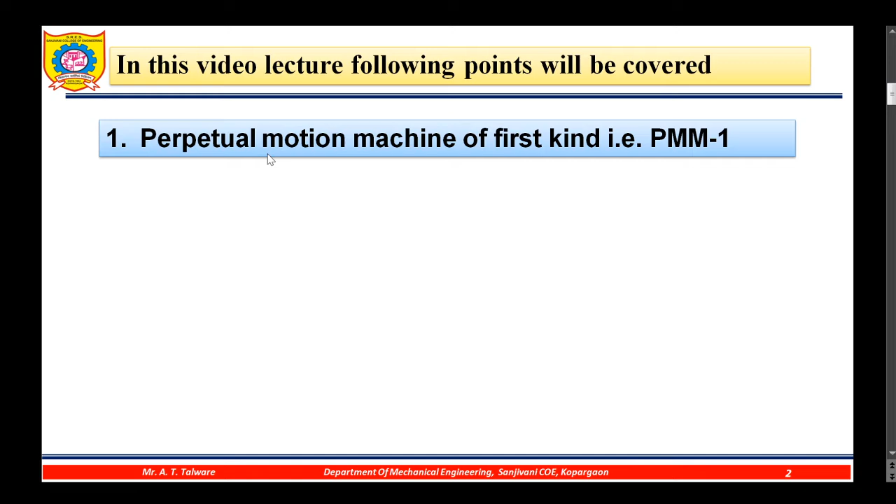First, perpetual motion machine of first kind, that is PMM1, and second, numerical on first law of thermodynamics for a closed system undergoing a change of state.

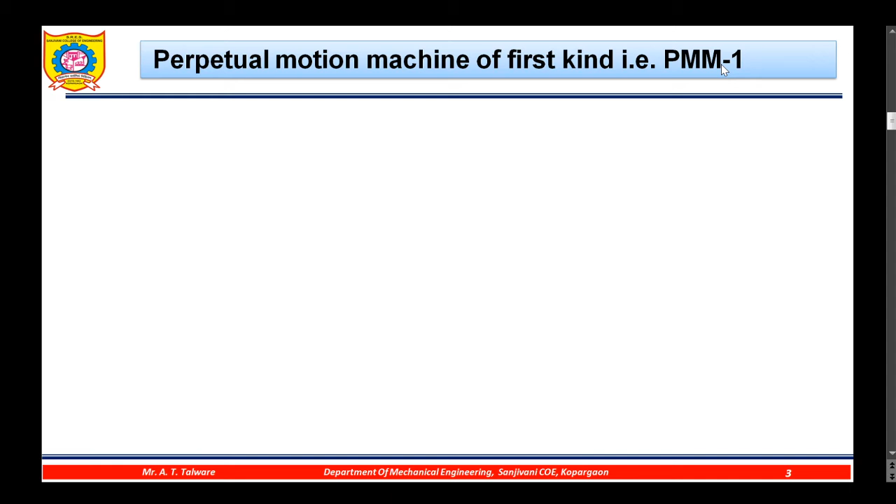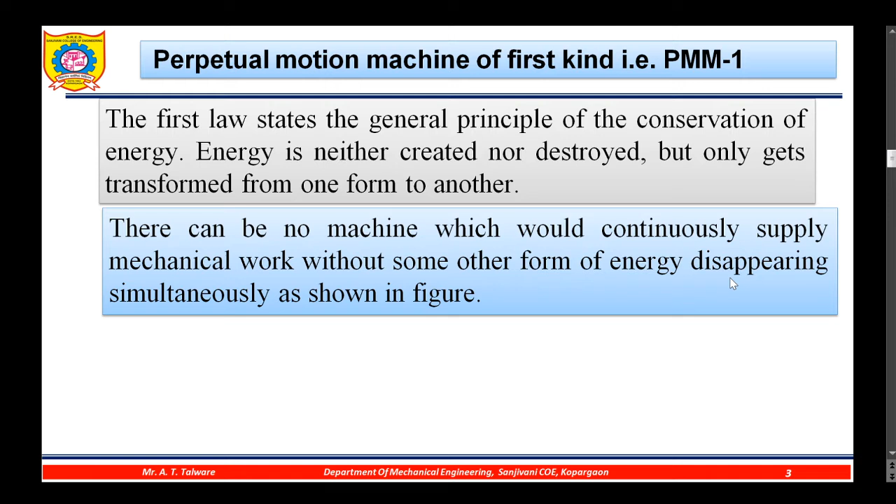Let's understand the perpetual motion machine of first kind, that is called PMM1. The first law states the general principle of conservation of energy. Energy is neither created nor destroyed, but only gets transformed from one form to another. There can be no machine which would continuously supply mechanical work without some other form of energy disappearing simultaneously, as shown in the figure below. So in this diagram, it is shown that work is produced, work output is there

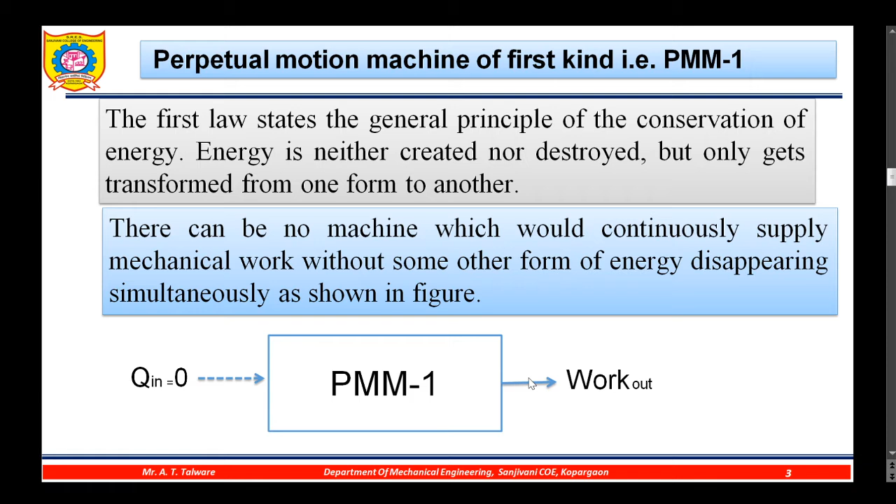without consuming any form, that is Q in is 0. Such a fictitious machine is called perpetual motion machine of the first kind, or in brief PMM1. A PMM1 is thus impossible.

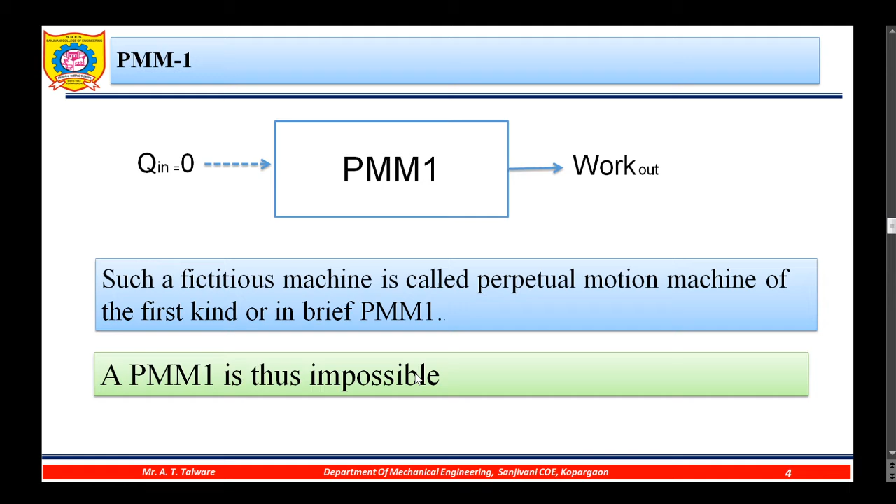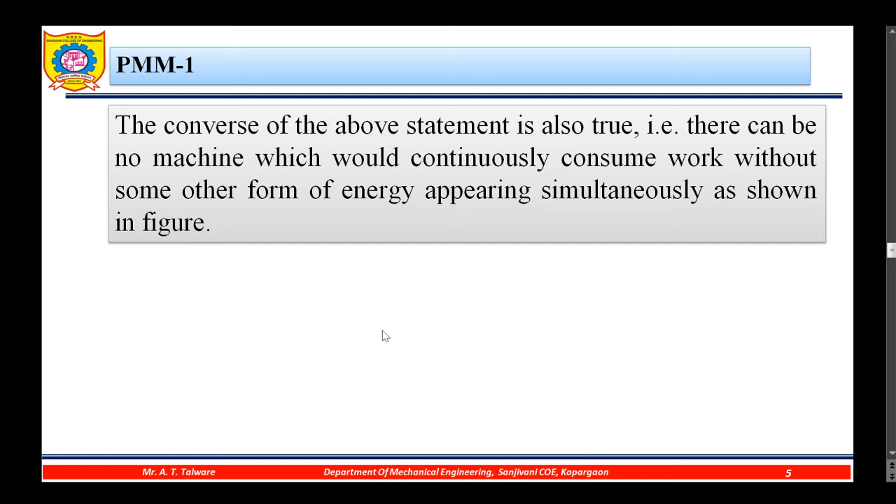The converse of the above statement is also true, that is, there can be no machine which would continuously consume work without some other form of energy appearing simultaneously, as shown in the figure below. In this diagram, it is shown that it consumes work, the work is supplied to the system, but the Q out is 0, or there is no other form of energy change occurring in the system.

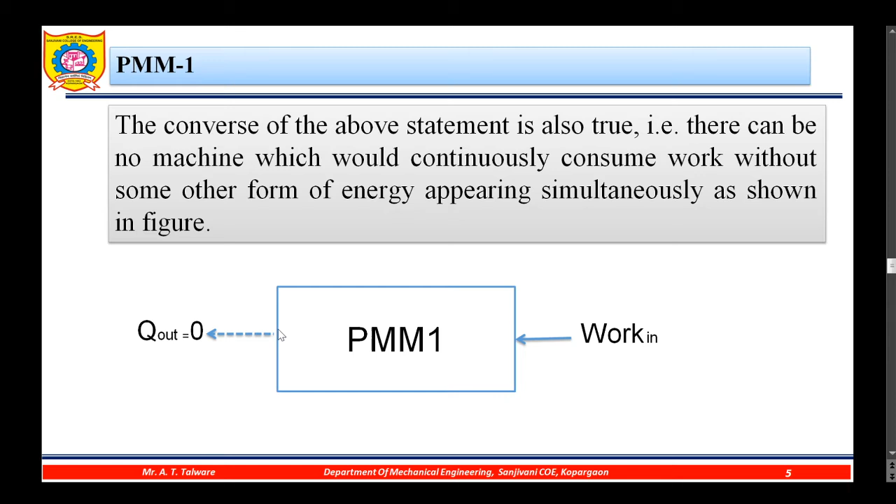So this is also impossible. Reverse is also impossible. So in unit number 3, we'll learn the PMM2 type, okay, that is the second kind.

Now we'll solve some problems on the first law of thermodynamics for a closed system undergoing a change of state. First problem: a stationary mass of gas is compressed without friction from an initial state of 0.3 meter cube and 0.105 megapascal to a final state of 0.15 meter cube and 0.105 megapascal. The pressure remains constant during the process. There is a transfer of 37.6 kilojoules of heat from the gas during the process. How much does the internal energy of the gas change? This is the problem statement.

Now, after reading this problem statement, what is constant here? The pressure remains constant. Here, see 0.105 megapascal and 0.105 megapascal. So it is a constant pressure process during which there is a transfer of 37.6 kilojoules of heat from the gas, meaning from the system to the surroundings. So this is cooling, heat will be rejected. So it's a constant pressure cooling process, or heat rejection process, which we can represent on the PV plane.

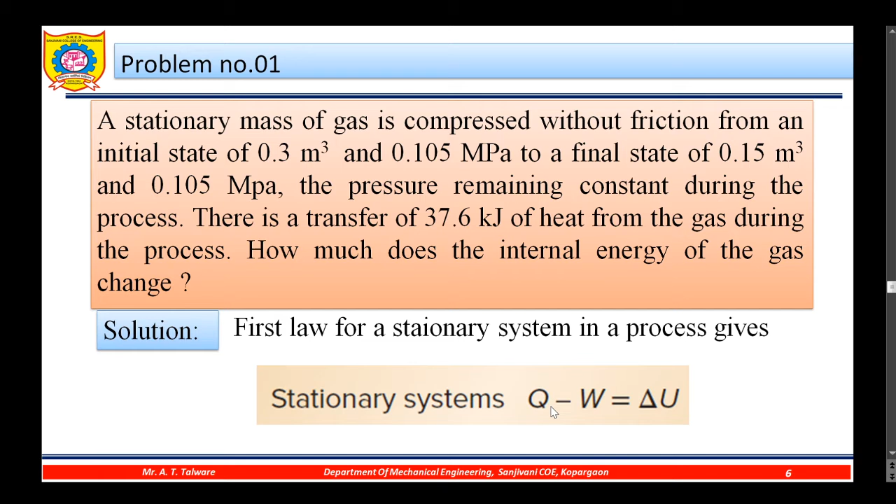First law for a stationary system in a process gives this formula for the calculation. There is a relation between Q, W and delta U: Q minus W is equal to delta U. Now this process can be represented on the PV plane like this, 1 to 2. The heat rejection process, Q will be out. Now we are to find out the relation, as I've told you, Q minus W is equal to delta U.

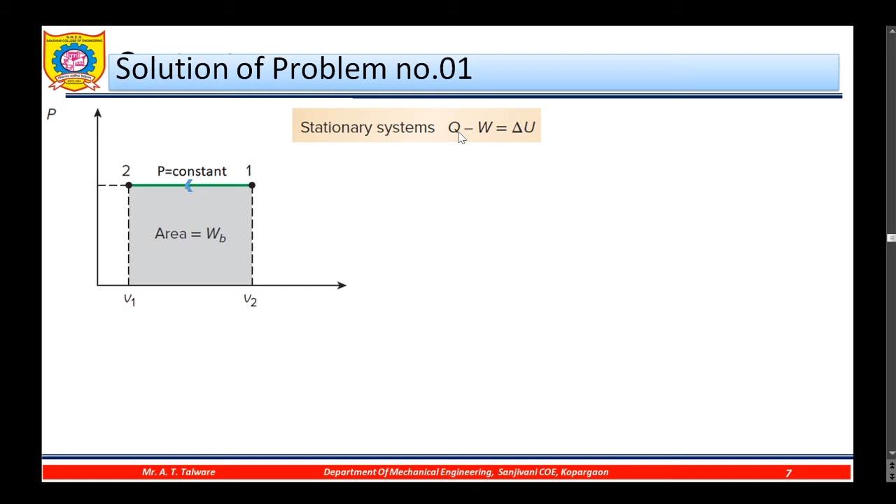The formula for work done, that is boundary work, is W equals P times (V2 minus V1). Here the pressure is given in megapascal, that is 0.105, converted into kilopascal by multiplying by 10 to the power 3, and the change in volume is 0.15 minus 0.3, which comes to minus 15.75 kilojoules.

Since we converted this, the 0.105 is in megapascal, so megapascal is converted into kilopascal. 1 megapascal equals 10 to the power 6 pascal, that is 10 to the power 3 into 10 to the power 3 pascal, so the multiplying factor is 10 to the power 3. Sorry, it is not in bar, it is given in megapascal.

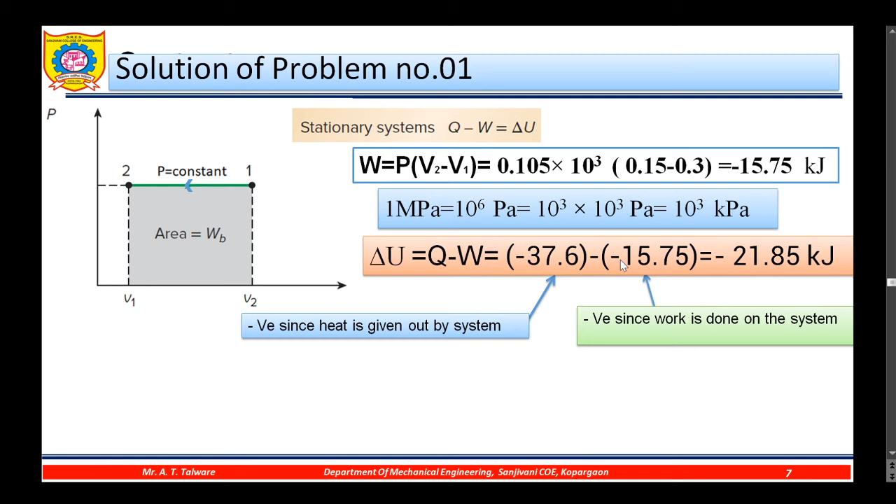Now from this equation, delta U that we have to find is Q minus W, and Q is minus 37.6 minus (minus 15.75), which comes to minus 21.85 kilojoules. So why is the negative sign used? The negative sign is used since heat is given out by the system. As per sign conventions, heat given by the system is negative, and since work is done on the system, the work is also considered negative here, that is minus 15.75.

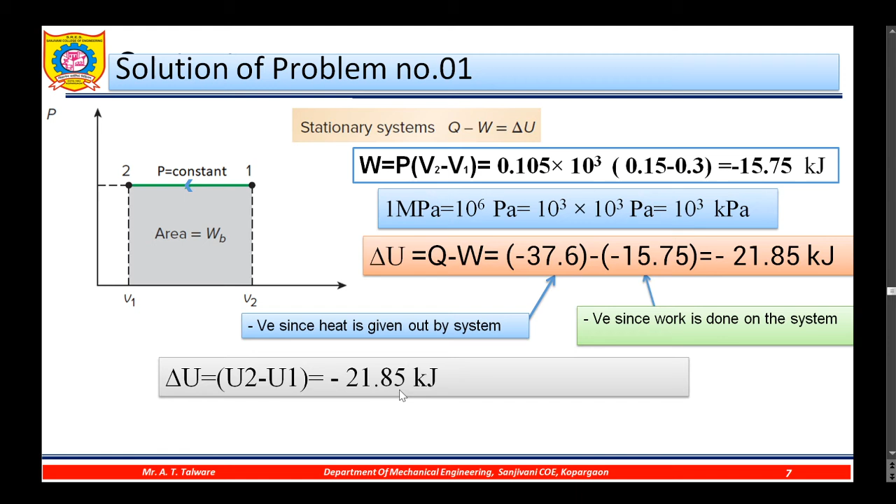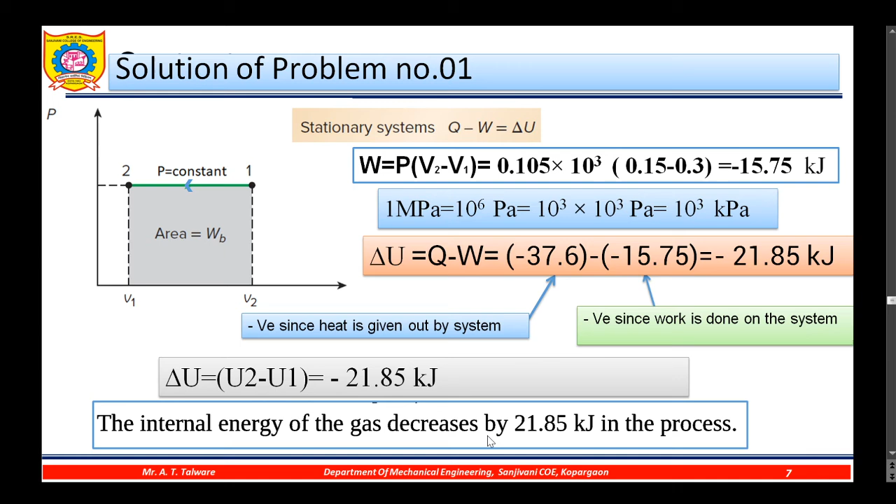We have to consider while solving the problems the magnitude as well as the sign, so that is very important. Now delta U is equal to U2 minus U1, that comes minus 21.85 kilojoules. The internal energy of gas decreases by 21.85 kilojoules in the process, because this negative sign implies decrease in internal energy of the system. So this is the final answer of this numerical.

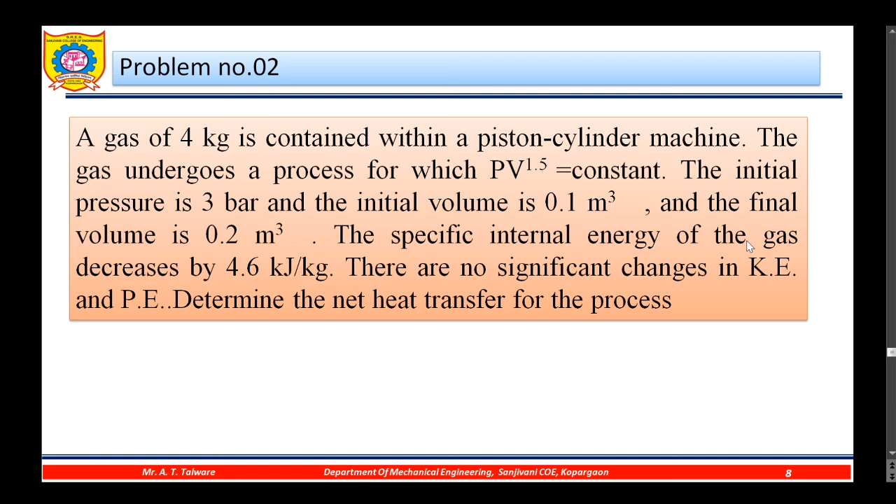Now problem number 2. The statement is like this: a gas of 4 kg is contained within a piston cylinder machine. The gas undergoes a process for which PV raised to 1.5 is equal to constant. The initial pressure is 3 bar and the initial volume is 0.1 meter cube, and the final volume is 0.2 meter cube. The specific internal energy of the gas decreases by 4.6 kilojoules per kg. There are no significant changes in kinetic energy and potential energy. Determine the net heat transfer for the process.

Now we'll solve this problem.

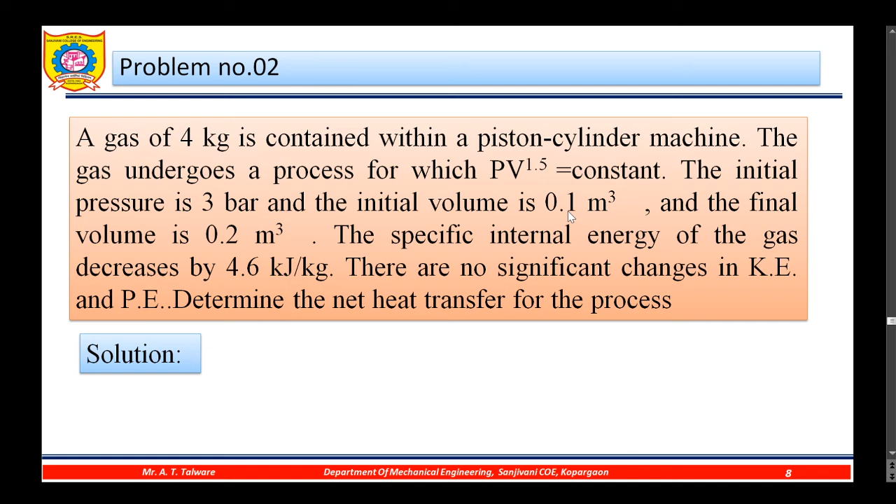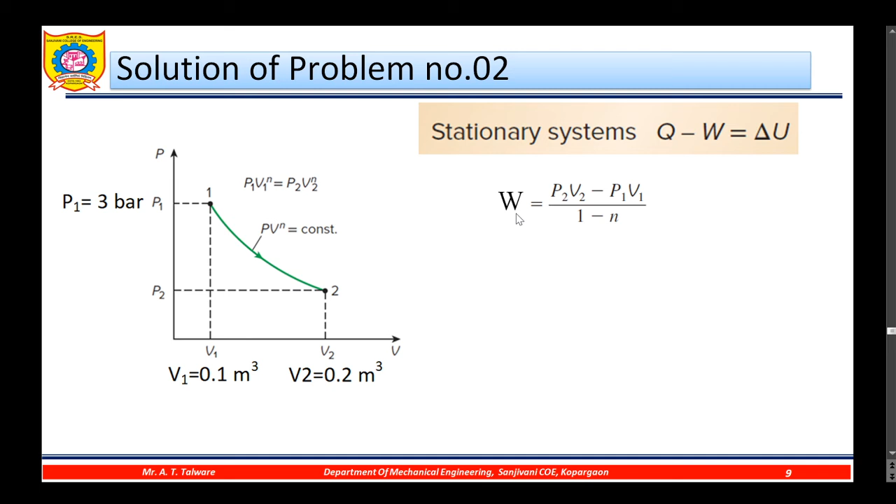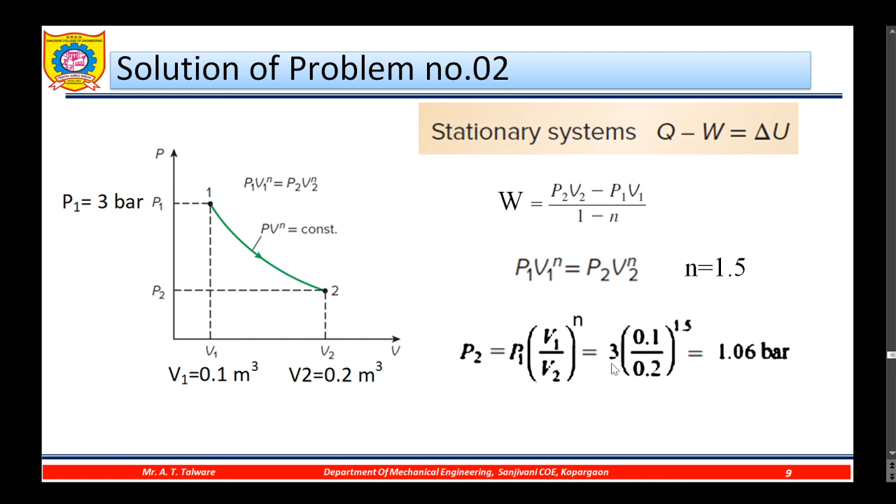Now we want to find out W, but we don't know the value of P2 in this equation. So we can find out the rest of the values, since they are given. P1 is given, V1 and V2 are given in this equation. Only unknown is P2, and N is equal to 1.5. These are the given values. So by knowing these known values, we can find out P2 with the help of this relation. So P2 comes out to be 1.06 bar.

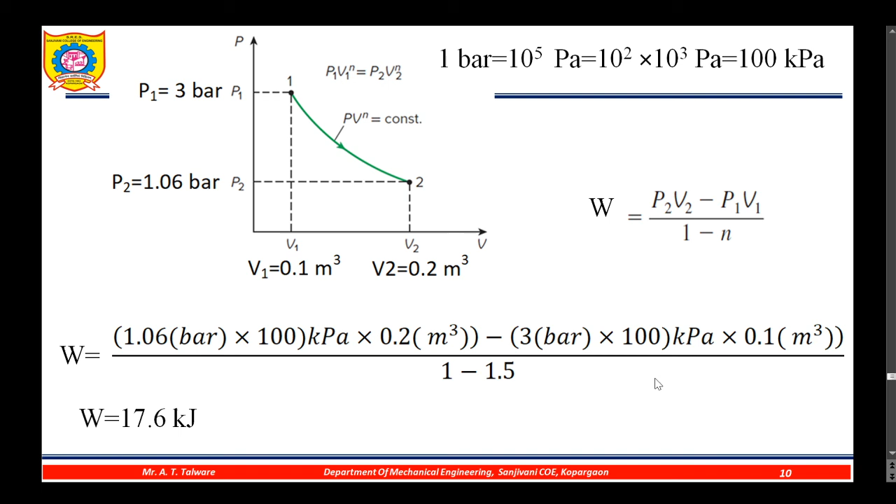Now we have found that P2 is 1.06 bar. Now we can find W is equal to P2V2 minus P1V1 upon 1 minus N. As the pressure is given in bar, 1 bar can be converted into 10 to the power 5 Pascal, that is equal to 10 to the power 2 into 10 to the power 3 Pascal, but 1 kilopascal is 10 to the power 3, so 1 bar is equal to 100 kilopascal. So we have to use that in this equation: W is equal to P2, which is 1.06 bar into 100, that is the multiplying factor here, giving kilopascal, into 0.2 meter cube. Similarly for P1 also the multiplying factor is 100, and the volume is considered in meter cube, divided by 1 minus N. So that comes W is equal to 17.6 kilojoules. So here unit conversion is very important, otherwise we will get the wrong answers.

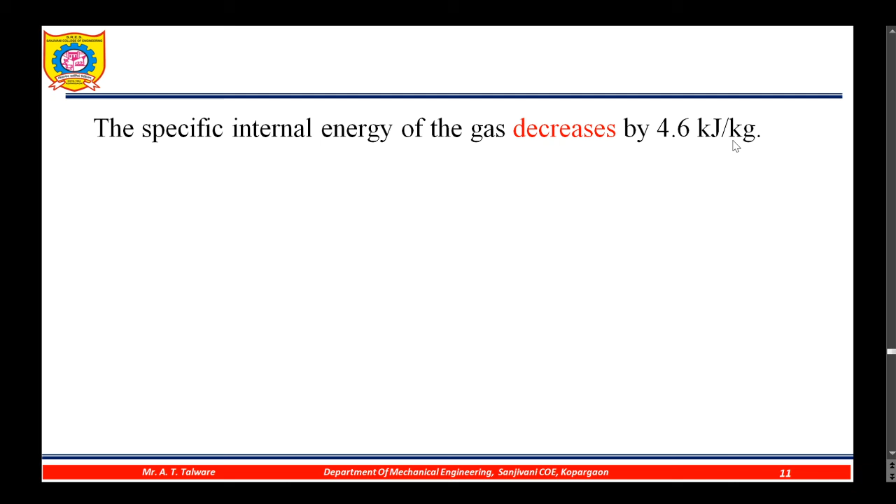The specific internal energy of the gas decreases by 4.6 kilojoules per kg. A gas of 4 kg is contained within a piston cylinder machine, so for 1 kg it's 4.6, for 4 kg we have to multiply it by 4. So change in internal energy, that is M into specific internal energy, comes to minus 18.4 kilojoules. So there is a decrease in internal energy of the system.

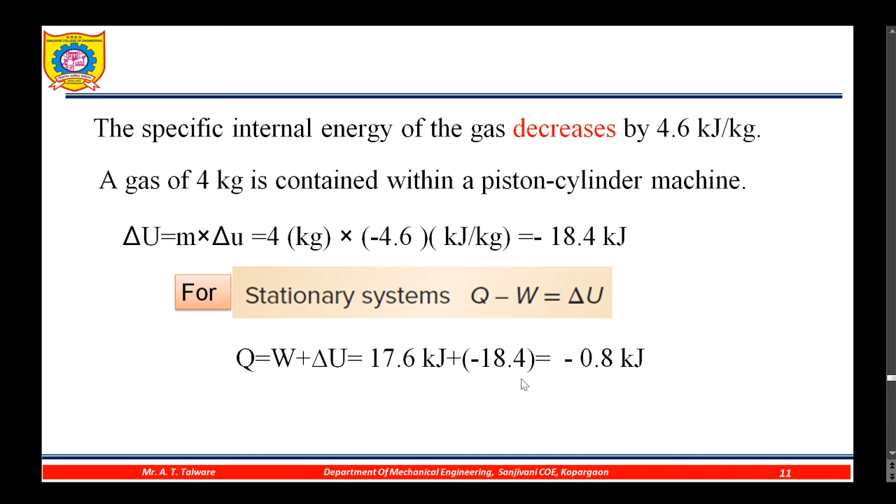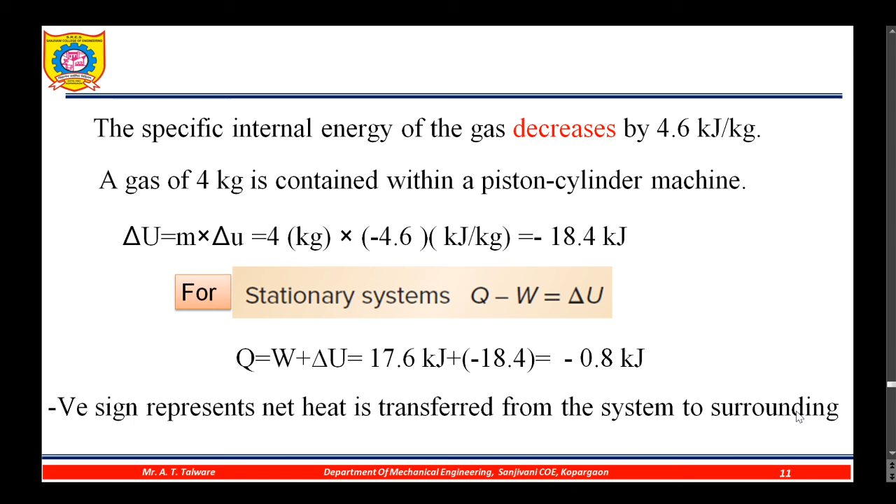So for a stationary system, Q minus W is equal to delta U. So Q is equal to W plus delta U, that is W we have found out comes 17.6 plus, according to this sign plus, and this delta U we have found out comes to minus 18.4. So there is a negative sign here in the answer, that is 0.8 kilojoules. That negative sign represents net heat is transferred from the system to surrounding. Thank you.